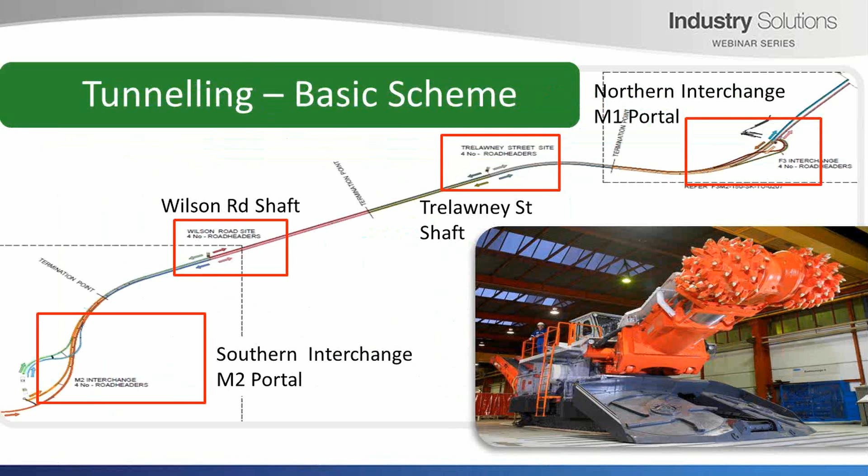All right, so for our tunnelling we've got generally 4 shaft areas. The shafts are sunk before we commence any tunnelling, and we're tunnelling using road headers.

We've got some milestones of the project. We're looking at roughly mid-2016 is when we commence tunnelling. The project's due to complete in late 2019, with all sorts of construction work to happen in between.

We also have problems associated with those, so consistency of systems across the project, trying to standardise the skills with a diverse workforce and the methods, managing the large amount of data that surveying on this project brings, and also your typical interfaces with third parties. One of the big ones is the availability of suitably qualified and trained personnel.

So early on we took the decision we were going to try and use a lean approach. We got forced into this, really. Automate as much as possible, and uncouple administrative process from production roles as much as possible. So we set about having a plan.

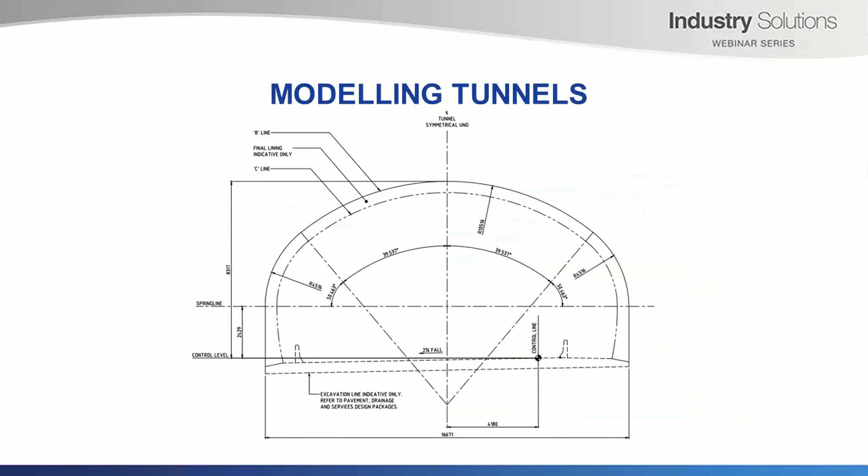We then have to draw this in 12D, and so we draw this in plan view. And we give it certain naming, so 12D can interpret all the various segments. This is just a superstring, and build its snippet.

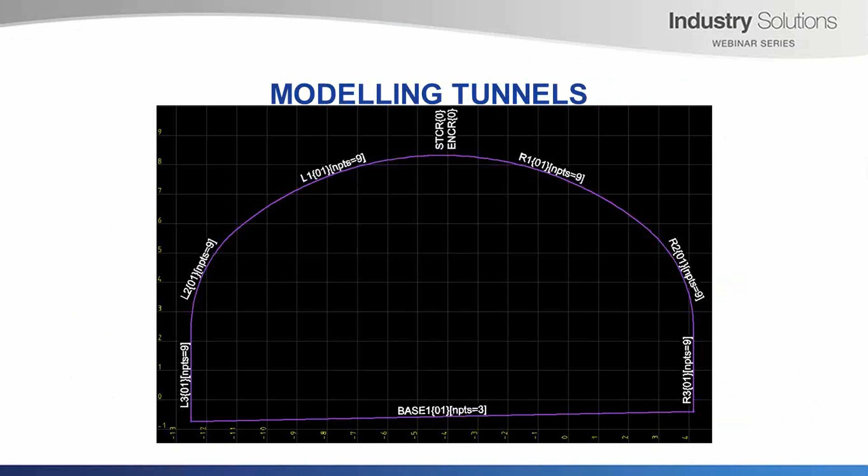We then pass this string into this snippets from profiles panel. You can see there you give it the profile and a snippet, and it creates it.

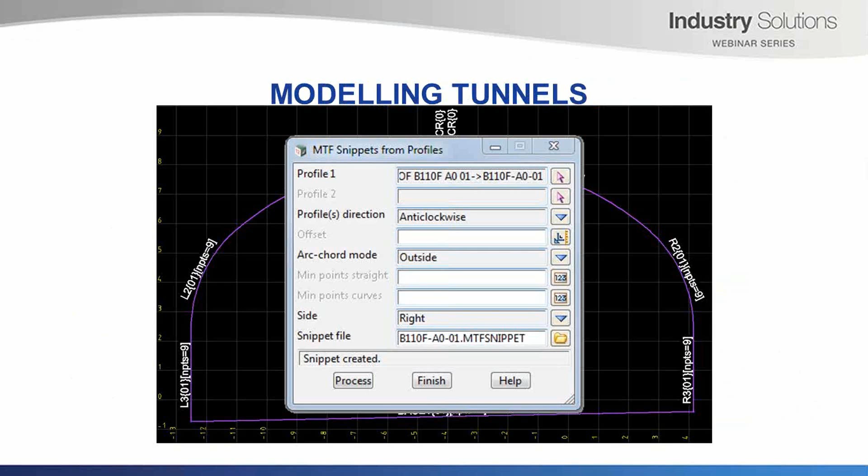So we are using mostly standard MTF commands. It's not that hard. One of the important parts is stretching heights, so we get a true perpendicular to the control line tunnel. We're also able to use layers, and we can use various layers for rock, various layers of shotcrete or structural support, benching, structures, and so on.

And using the MTF allows us to also modify the tunnel without creating additional profiles, just using your standard modifier commands. So for example, things like jet fans, egress or cross passages, and the tricky areas like junctions.

So with the shapes, we're using some of the new features. We can have varying links. So what this means is that you can have your profiles change, so long as your start and end link are constant and always present, the number of links in between those...

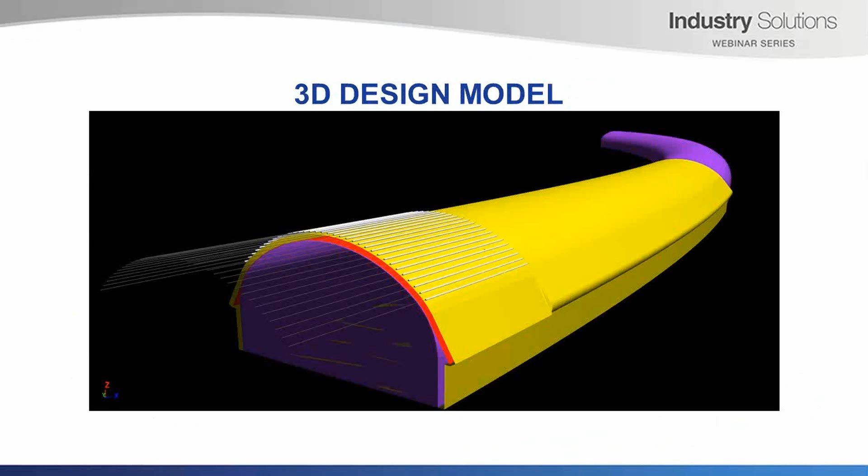And the good thing with this is, it's not just pretty pictures. Pretty pictures is just one of the outputs of it. But all of this can be used directly in the field, so users can directly set out every bit of information you see on screen there.

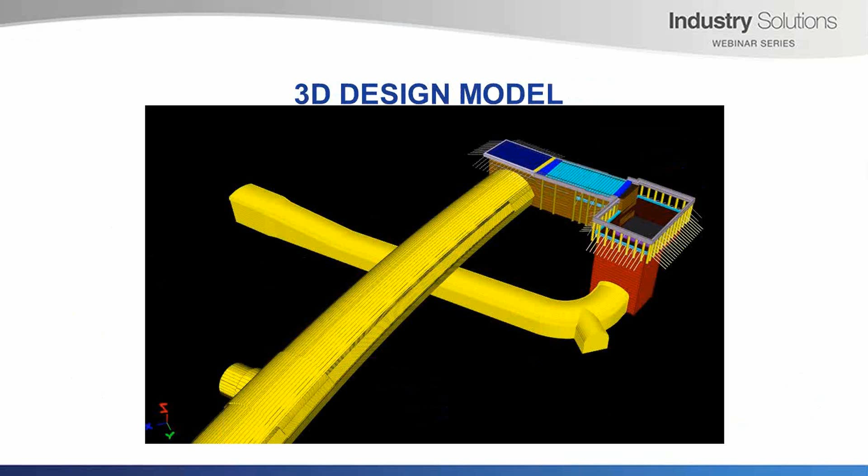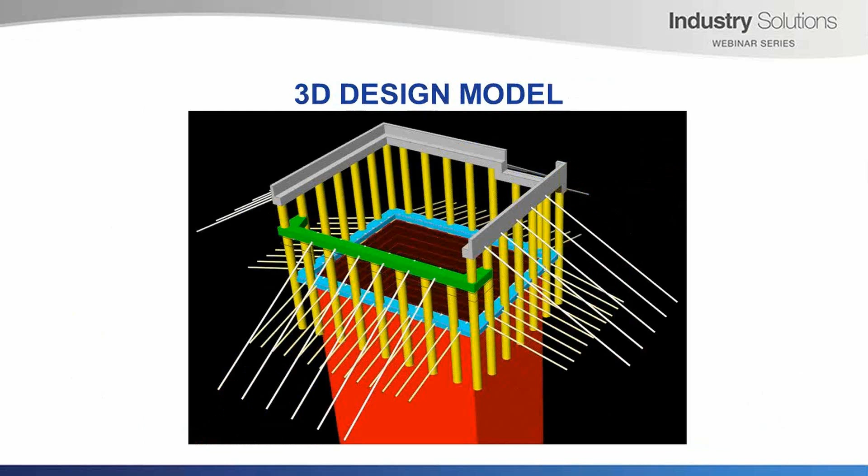So again, here's just a close-up of a typical shaft with lots of piles, capping beams, rock bolts and anchors. That's all fairly standard things, just 3D strings in 12D.

So how do we manage the model? All our control alignments, everything's dependent on control alignments. So we make sure they're versioned, so we can tell how things have been set out and whether people are using out-of-date information, and we also verify the geometry. We do this using our custom reports, and we put this into a spreadsheet that just highlights any discrepancies between our design and the design we get from our designers.

Okay, tunnel definitions as well. So new in version 12, we can now attach tunnel definitions directly to the center line. Previously they had to be separate files. That just became too much to manage. So now we can set these, and these are just stored as attributes on the control line.

We also have a central data model, which we'll go through in a bit more detail later on. It's centralized, restricted, version controlled with 12D synergy, and we actually automatically push this out to surveyors.

So, what are some of the successes we've had through using 12D? We can quickly and easily model tunnels. The use of MTFs and snippets allows us to produce a very flexible 3D model very quickly. The versatility of tri-meshes also means we can model a lot of different objects. We can use them for tunnels, for structural elements, for roads, for pavements, for pretty much anything we want on our project. And the use of 12D obviously takes some dumb data and makes it a bit more smart, with things like attributes.

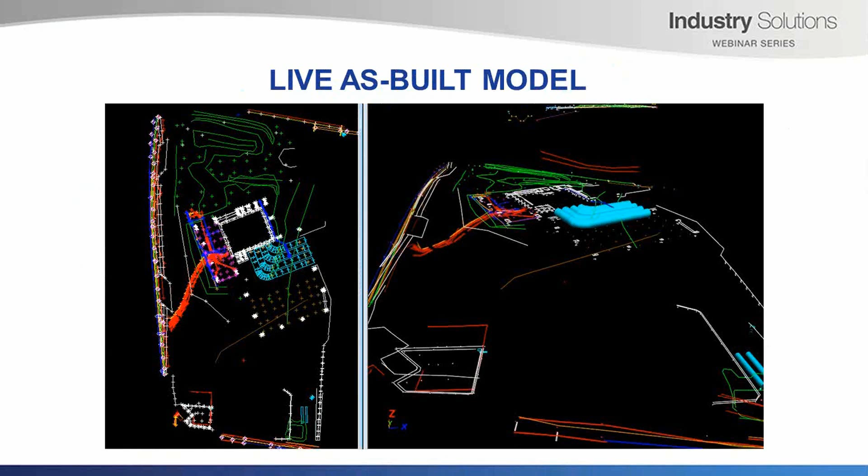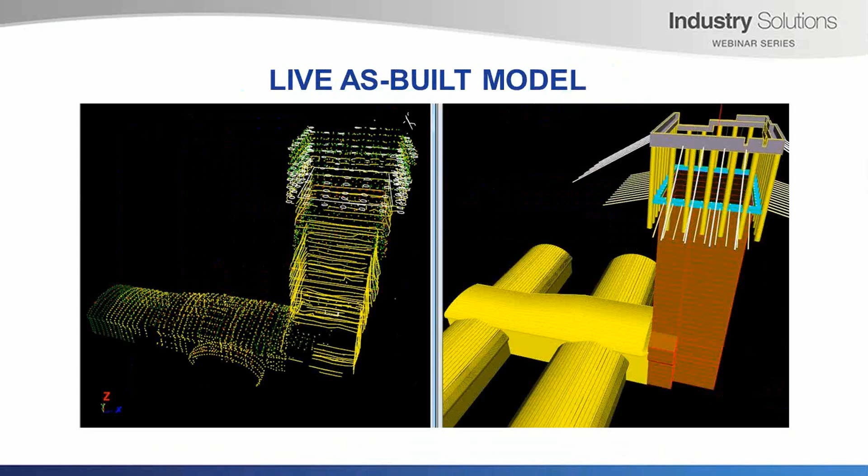Very important for meeting our QA requirements. I'll show some screenshots—these are taken directly from our live as-built model, so directly from our central data models. These grow over time as users submit fieldwork, which we approve and import into our central data model. Here's a nice one showing our as-built model on the left, what's actually been built and picked up, versus our design model on the right. You can see they're pretty much spot on, and we can do various reports and conformance checks on those.

So what are some of the successes we've had? We get automated data submission. We can collect data whether offline or online, which is a big improvement on this project. Importantly, by automating these processes, we get structured data—all data from anyone on this project is the same, and it's usable. We don't spend hours massaging or editing it; it's immediately usable.

Importantly, when we feed this back through our central data model and out to our field surveyors, all the survey staff are using the same base data. We don't have to worry about someone using out-of-date information—we can see it's all up to date with Synergy. The data is current, controlled, and live. It's a dynamic model; we're not building this at the end of the project, just when we have to. We're building it as we go along.

I'll now hand over to Dave, who will talk about some of the interfaces and outputs we'll have.

Okay, thanks, Matt. A few more challenges for us—this data is relied upon by others, other functional areas, including other areas within our survey department. Guidance and machine control is a very big one. Monitoring, deformation monitoring, and the collection of data as an input for this is also big. Utilities, geotechs—these are all forms of data relied upon by others.

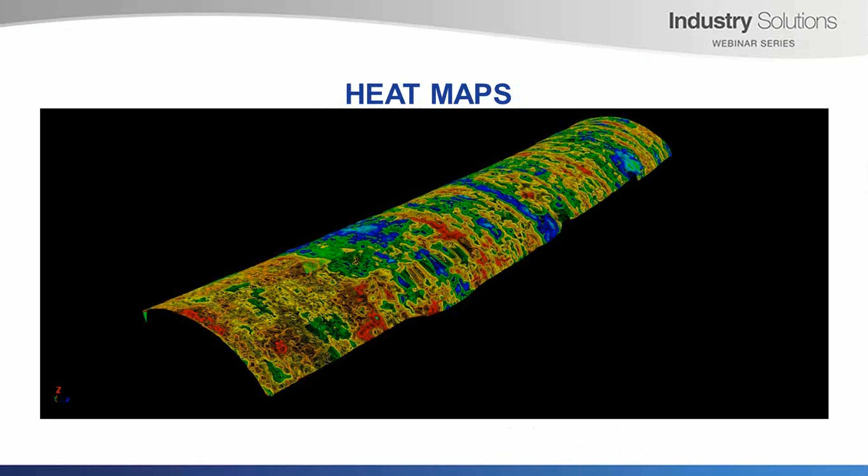And of course, once you've rewrapped it into 3D space, you can then actually set this information out, so you can trace it with your instrument laser on site in the tunnel and show your operator where they actually need to excavate. It's a very powerful tool. We're only really scratching the surface with this one, but hoping to use it a lot more.

So the successes we've been able to manage through the use of 12D software: we've automated outputs to others, for instance guidance and monitoring, eliminated as much as possible double handling of data - this is wasted time. We're able to make better, more informed engineering decisions in the field, and of course spend less time in the office.

Now I'll just talk about some of the conclusions and benefits of our partnership with 12D. We've been able to develop what we consider industry-leading systems. These are not things typically done in the past. Even on tunnel projects, I think these are new, innovative solutions.

We've been able to provide an integrated solution, with 12D Model and 12D Synergy working so well together, but at the same time it's also flexible and customizable. None of this would have been possible without being able to write our own macros, customize the interface, customize reporting and plots to the extent that we can with 12D Model and 12D Synergy.